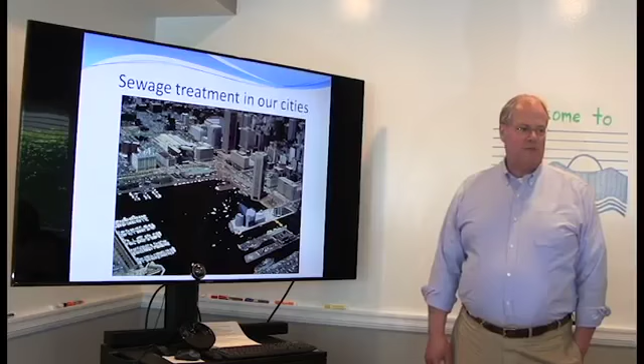Okay, so Maryland, where we are today, is home to over 5 million people now. Most of them, about 80%, live in the cities, but many live in the suburbs and rural areas of the state, which you have visited. And I'm going to talk a little bit first about sewage treatment in the cities because I think this is most applicable to the situation that we're seeing in Rio today.

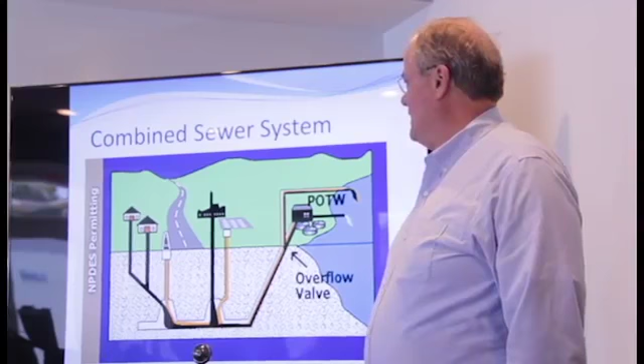So in the United States, there are basically two types of sewage collection systems. Of course, the first step is to get the sewage from the home to the sewage treatment plant. This stands for publicly owned treatment works, but it could be privately owned as well. We have both public and private. And the older type of sewage system is called a combined system. And this is where the sewage and the stormwater from the street runoff go into the same set of pipes and go to the sewage treatment plant.

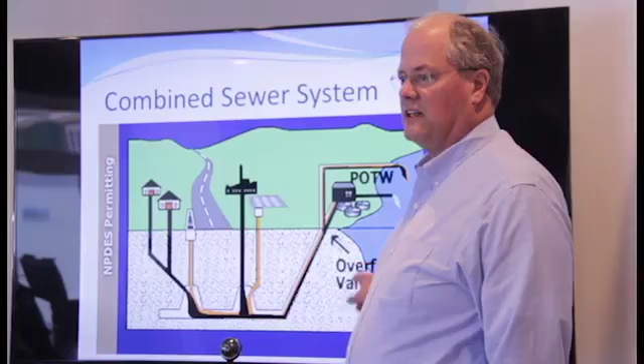And what happens is when there is a big flood, a lot of rainfall, there's an overflow designed into the system which spills the mixture of sewage and stormwater directly into the Chesapeake Bay or whatever the body of water is. So the system in Rio right now, because the collection system needs so much work, much of your sewage winds up in stormwater. So this is probably more similar to the situation in Rio than the other typical kind of system in the U.S.

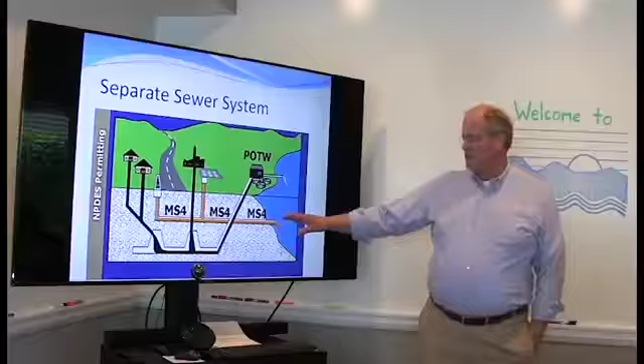The other is called a separate sewer system. And this is where the sewage and the black pipes from the industries and the homes go directly to the treatment plant. There is not a designed overflow because the stormwater is collected in a separate system of pipes which go into the water body. And so this is largely what Baltimore City is like. And on the other hand, Washington, D.C. is one of our largest cities with a combined sewer system. And Washington right now is in the middle of a $4 billion restoration effort to try to correct the spilling of sewage from the combined system.

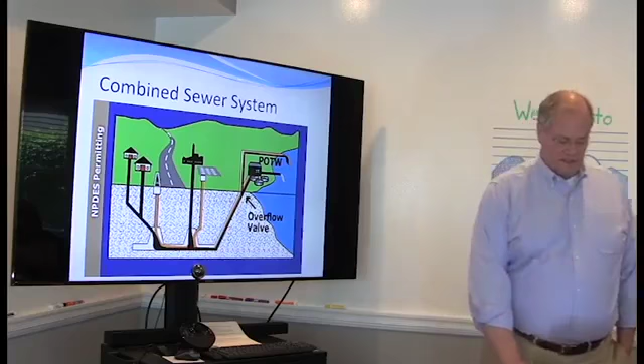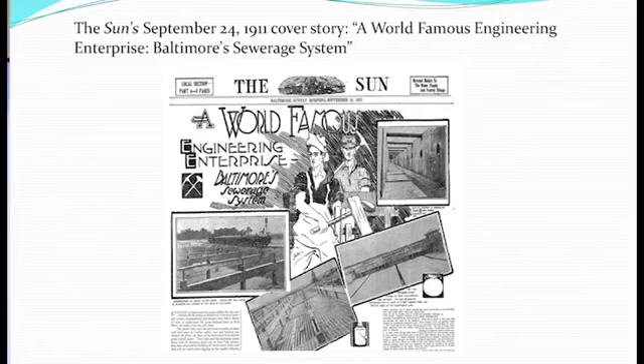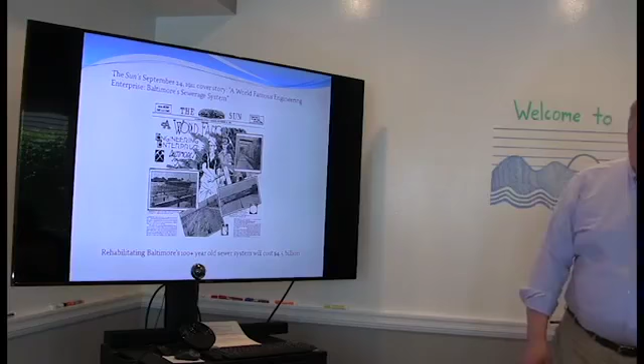So I'm going to focus on Baltimore for a minute. This is the Baltimore newspaper from September 1911. And it's announcing this engineering marvel, the new sewer system for Baltimore. So it's been over 100 years since our system was built, and right now we're in the midst of a rehabilitation program to fix the collection system that's going to cost an estimated $4.5 billion. So even though Baltimore has a much more developed sewage system than Rio, we are also at the same time in a major rehabilitation effort. So hopefully there are things from our experience that can be of help there.

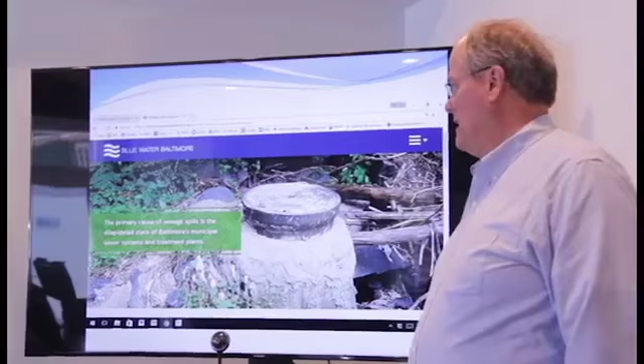This is the web page from one of our non-governmental groups, I guess a social action group in Baltimore. This is Blue Water Baltimore, and they have a whole web page devoted to educating citizens about the problems with Baltimore's system, and it's basically, as it says, the dilapidated state, the disrepair of our sewage collection system is the reason for the spills and problems.

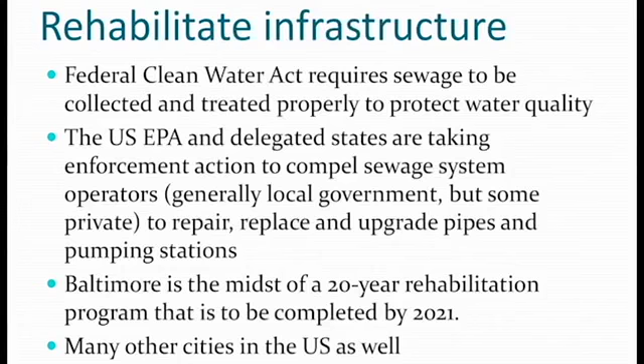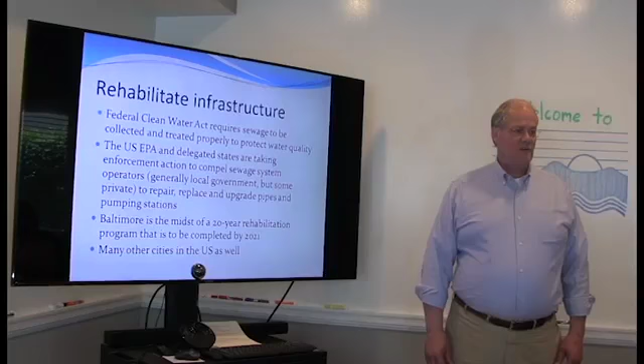So, major effort in the United States underway. All the old cities in the country, Baltimore, Washington, Philadelphia, New York, they're all undergoing right now rehabilitation of infrastructure required by the Federal Clean Water Act. The way the Federal Clean Water Act works, the U.S. EPA is in charge, but they can delegate responsibility to the states, and so the states and EPA working together are taking the enforcement action. And this rehabilitation is a 20-year project, which right now is scheduled to be completed by 2021. So we're literally in the middle.

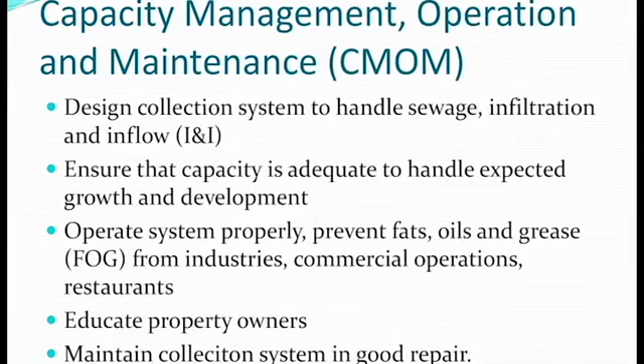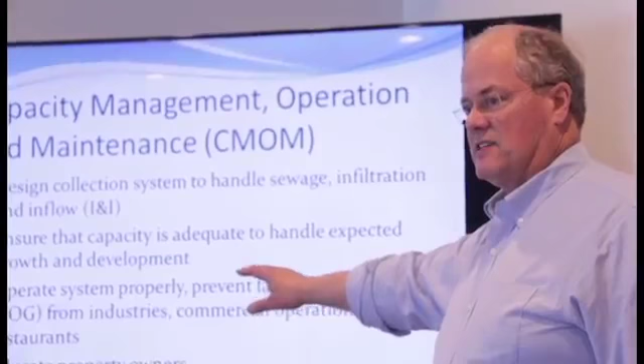In addition to rehabilitating the system, a large part of the sewage spill problems that we have occur because of improper maintenance of the system. And in the Clean Water Act, this is referred to as Capacity Management, Operation, and Maintenance, or CMOM. And it has to do with making sure that the collection system, the size of the pipes and the pumps, are large enough to handle the sewage that is expected to come into the system. That's capacity management. And then operation and maintenance has to do with ensuring that the system's kept clean, that there are preventative measures in place. For example, there's something called prevention of fats, oils, and grease, or FOG.

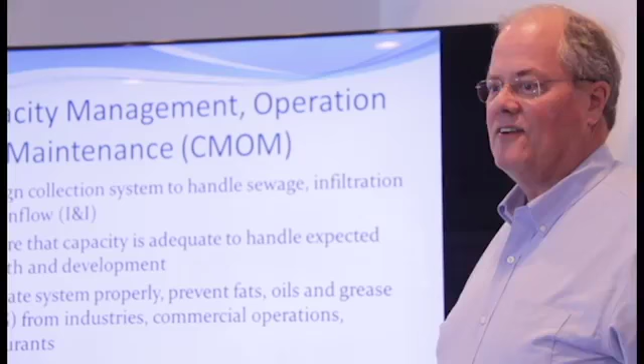Restaurants and homes and some industries, if they discharge things into the sewer system, it can literally gum up the works. The fats, oils, and grease form clots, just like in your circulatory system if you have high cholesterol. And then education of property owners and maintaining the system in good repair.

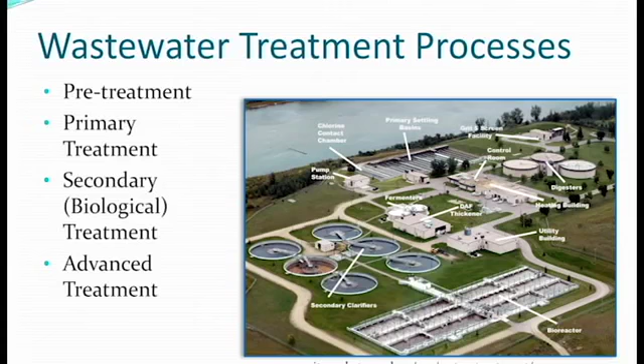So moving on to the actual sewage treatment plants themselves, we have many different technologies and different size plants in the state of Maryland, and I'm going to talk a little bit about the technologies. The basic treatment processes we use, pretreatment to get grit and logs or whatever else may come into the system out before it goes into the primary treatment area where chemicals are added and you get coagulation, the sediment and particles coagulate and settle out.

Then it moves into secondary treatment where we use biological organisms to treat the sewage, and then advanced areas, the bioreactor and thickeners in the system will allow all the sludge to settle out and discharge fairly clear, clean water. And the final step before discharge is chlorination to kill the bacteria, and that then is discharged.

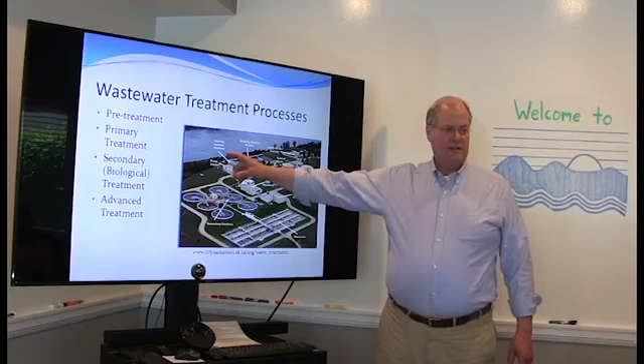This is very similar to the Alegria plant. The design of the Alegria plant in Rio is very similar to this. The difference is Alegria, and my understanding is most of the other plants in Rio, do not have disinfection as an end step. And this is something that we looked at early on in my travel to Rio, and something we believe needs to be seriously considered as an addition to your sewage treatment processes.

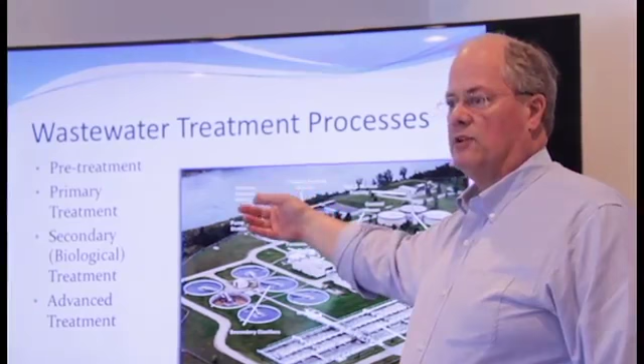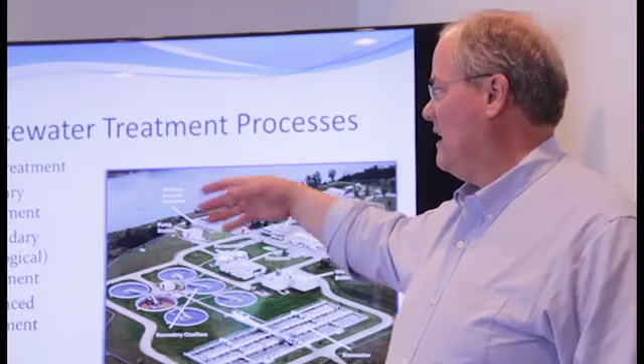And I know there's some controversy. We heard it expressed that chlorine can be toxic to wildlife. However, as high as loading is in Guanabara Bay right now, we don't believe that chlorine is going to cause a problem for the fish. It will in fact be dissipated almost as soon as it gets discharged into the bay, because the bay is so heavily loaded with organic material and bacteria. But what it will do is reduce the human pathogenic viruses and bacteria that are a big problem in Guanabara Bay.

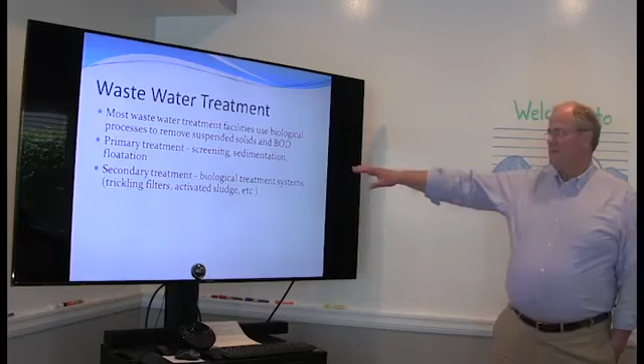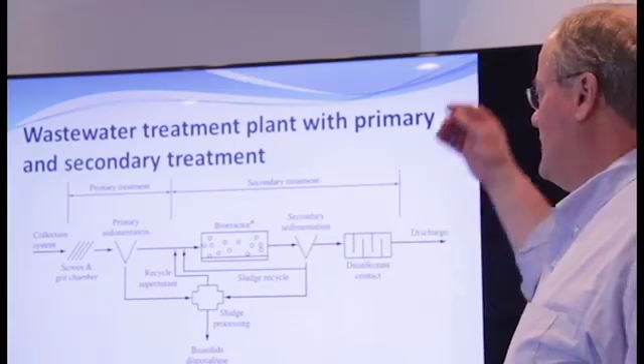So most of the treatment facilities are like what I just described there, pulling out suspended solids and biochemical oxygen demand, again, very similar to Alegria. And the treatment steps we refer to: primary, pulling out basically the big pieces, screening and floatable material, trash or whatever. Secondary treatment, the biological treatment process, and then a typical plant with primary and secondary treatment is shown in this graphic here. I mentioned the screening grit, primary sedimentation, the sediment from here, also from the bioreactor, moves into sludge processing, and I'll talk a little bit more about that in a minute.

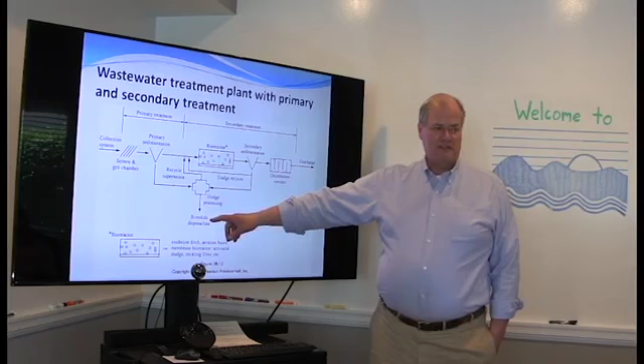My understanding is most of the biosolids or sludge in Rio wind up going to landfills. In this country, other disposal methods in addition to landfills are used. Then in Chesapeake Bay, in order to remove the nutrients, which are the big pollution problem in the bay, we've added what we call biological nutrient removal, starting back in '84, upgrading all of our state's major treatment plants with biological nutrient removal first, and then more recently, beginning in 2004, we started what we call enhanced nutrient removal, bringing nutrient levels down even further.

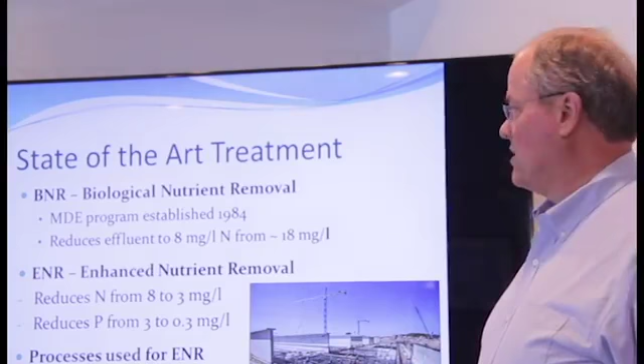And the company that I've been working with, KCI Technologies, is doing a lot of the design and engineering work for these advanced treatment plants. And this is one of the ones we're working on. This is the largest plant in Maryland. This is the Back River Wastewater Treatment Plant, and the largest plant on Chesapeake Bay is Blue Plains in Washington, D.C., that collects sewage from the whole Baltimore, Washington metropolitan area, but it's a very large facility.

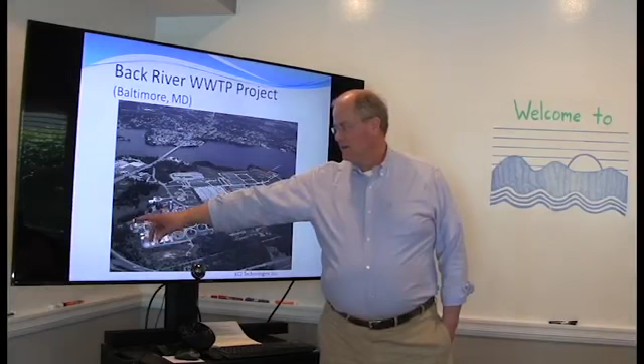And Back River is known in the neighborhood. You can see these kind of gold domes there. When you drive by on the road, these are towering structures. They look like two golden eggs. And they're actually digesters where the sludge goes in and is digested. They produce methane gas, which is burned for energy, which powers all the pumps in the plant.

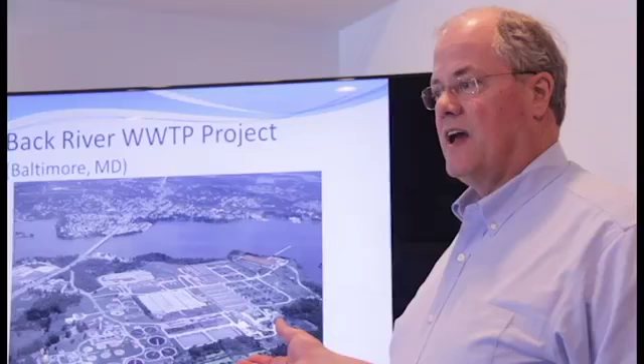And then the digested sludge is highly treated to produce what we call Class A sludge, which has been composted to destroy pathogenic organisms, and then it can be used as a soil amendment for cropland and gardening. There's actually a product that's sold in many of our gardening stores called Synagro, which is a sludge product, which home gardeners, unless they read the label carefully, don't really realize, but it's used pretty widely.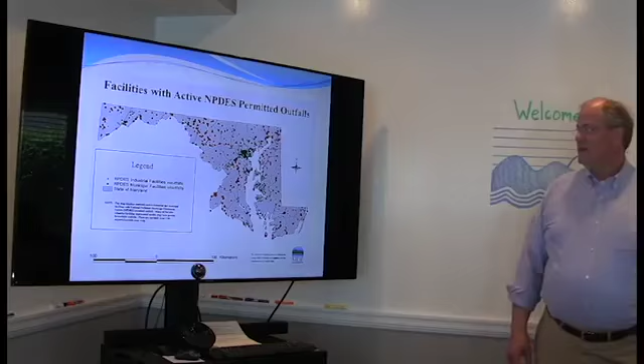And this gives you an idea of the number of discharges we have across the state of Maryland. The red are all of the towns, municipal and county discharges, and the green are industrial, and they're all held to very high discharge standards. And these are the major plants. These are the ones that are larger than 500,000 gallons per day, which is roughly equivalent to, I think, probably 20,000 people.

So all the bigger towns have the advanced treatment that I mentioned, biological nutrient removal and enhanced nutrient removal. And we're right here in Annapolis, and the sewage is going out right through that dot right there.

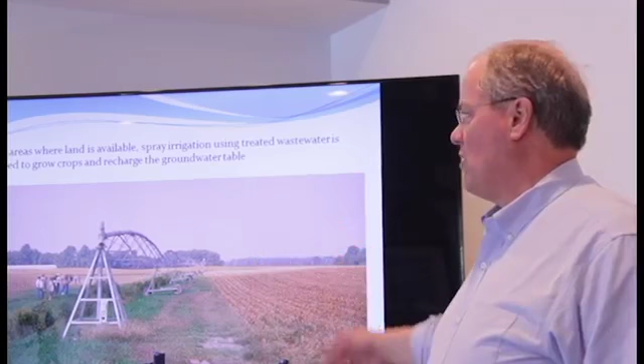And then in more rural areas of the state, the treated sewage is not discharged into the water or the river. It's actually used to irrigate crops. And it's typically not used for food crops, but it can be used for corn that's grown for animal feed. I should say not human food. But a lot of places have gone to growing hay and straw because that's very important. We'll talk in a minute about sediment erosion control. There's a big market for those kind of crops.

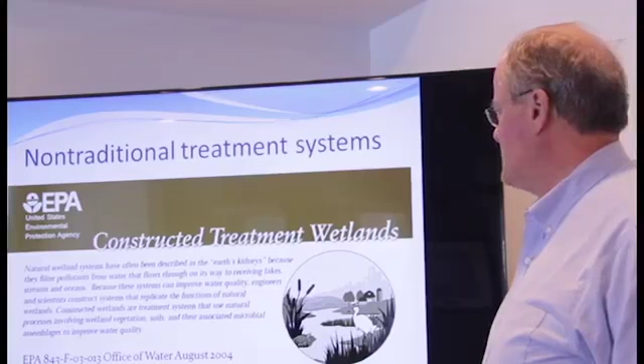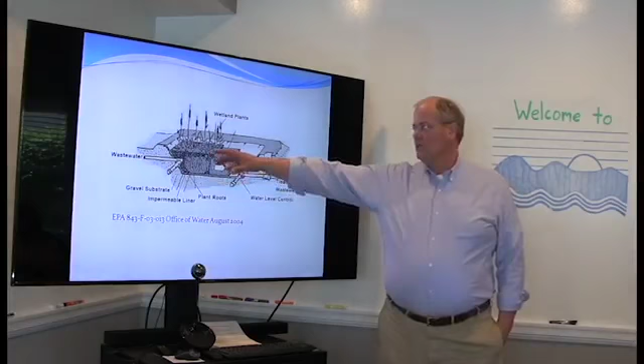And in the U.S., we also have what we refer to as non-traditional treatment systems, constructed treatment wetlands. This is a fact sheet from the U.S. Environmental Protection Agency, and wetlands are very effective at removing contamination from sewage and runoff and other things. And it's fairly simple construction. The wastewater comes in, it's set up so it filters through the wetlands before it passes out, and it can then be discharged.

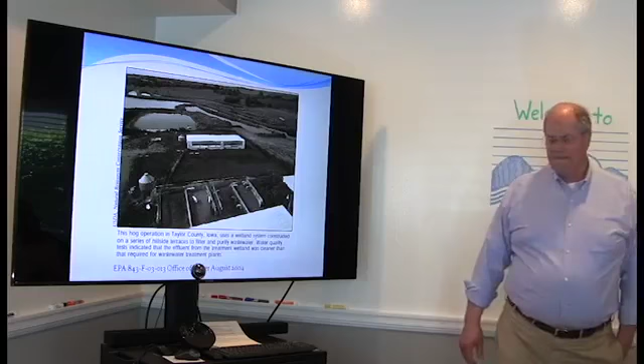And this is just a photo from the fact sheet of a large wetland treatment system for a hog operation. These things can be used for animals as well as humans. And of course in Rio, there are a lot of mangroves growing, and mangroves are also used, like wetlands, to treat sewage. This is from an article about a constructed wetland treatment system in China.

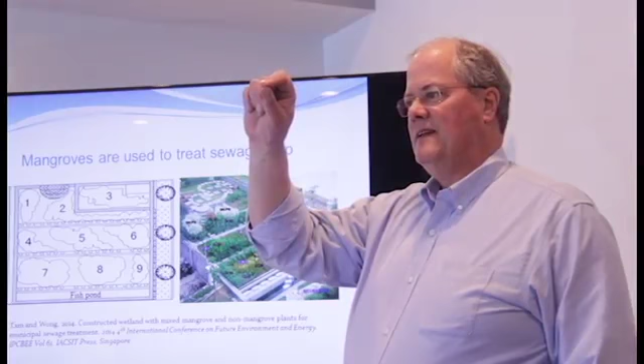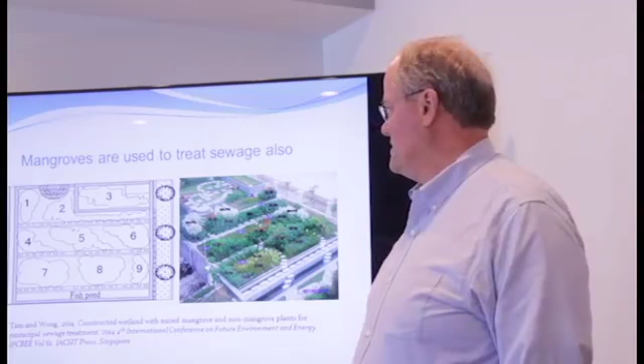And in fact, when I was in Rio and we went out to what's the town at the north part of the bay, Magé, thank you. They were in the midst of designing and building a treatment system like this that would allow the mangroves in the coastal area to treat the sewage from a school there. And so there are what we would call non-traditional opportunities that could be very beneficial in the Rio vicinity.

And then in rural areas, we basically dispose of sewage in the ground. And a house, rather than having a connection to a sewage treatment plant, will have a septic tank and a drain field. And basically the sewage comes out of the house, the solids settle in the tank, the liquids go off the top into what's called an infiltration trench, where it can then percolate through the soil. And if it's designed properly, the soil removes all the bacteria before it gets into the groundwater.

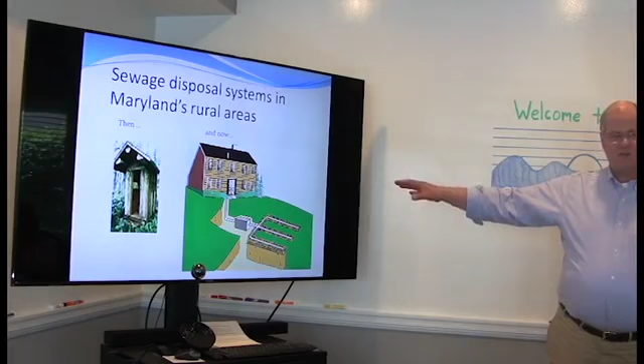One of the big problems we're having is a situation where the water table, the groundwater is too high, the bacteria doesn't get removed, and these can create quite a serious public health problem if they're not properly maintained. We have regulation requirements. These are done by the state and local health departments to protect public health, prevent exposure to sewage, and the homeowners and businesses pay for their systems themselves.

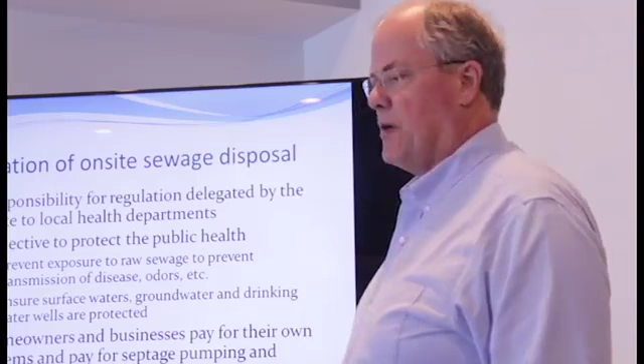These are called private sewage treatment systems, and you can see roughly $5,000 to $7,000 per home is part of the capital cost of the home to put the system in, and about $100 a year for pumping and disposal of septage, the solid waste. So it's a pretty inexpensive way to treat sewage. And the septic tanks, they need to be pumped out, and the solids are pumped out and taken to sewage treatment plants for disposal.

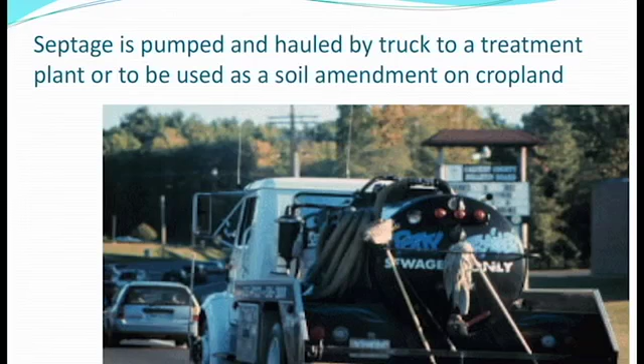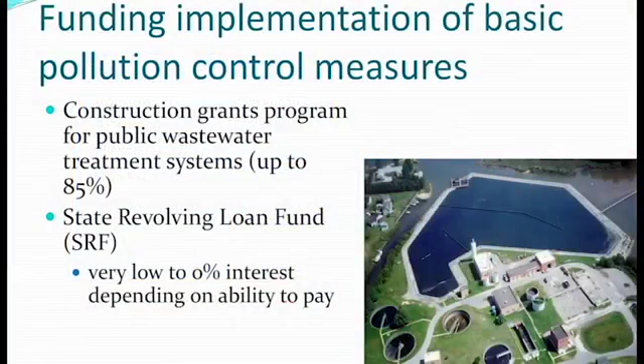So the funding for all of this initially came from the federal government through what was called the Construction Grants Program that was passed with the Clean Water Act in 1972. And they paid up to 85%. In the 90s, the Construction Grants Program was changed to what's called the State Revolving Loan Fund, and the federal money then was given to the state to put in a state-operated bank, and the state then could lend the money to sewage treatment plant owners at very low interest. The owners would pay back in, and so it's called revolving, to keep the fund available for upgrading additional plants. And this has been a very popular and successful program.

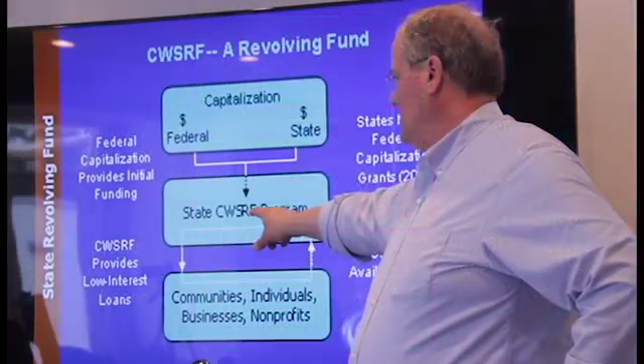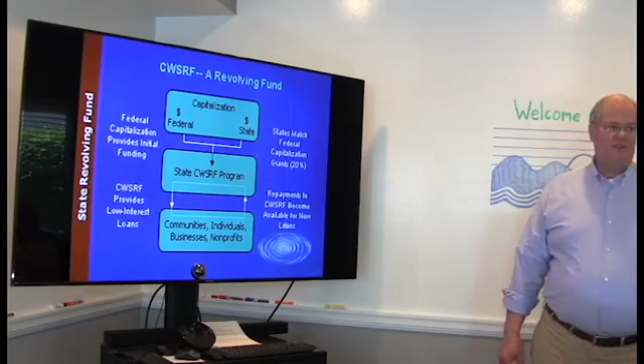So the capital funds come federal and state, more fed, less state, into this bank that I mentioned, where they loan the money out to communities and businesses and individuals, and it pays back. And so this is called revolving. And right now, Maryland's revolving loan fund has a capacity to hand out about $700 million a year in low interest loans. So it's a very effective way to finance sewage treatment. It's also similarly used for water.

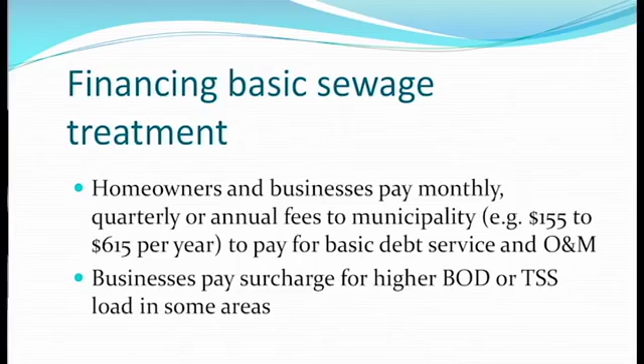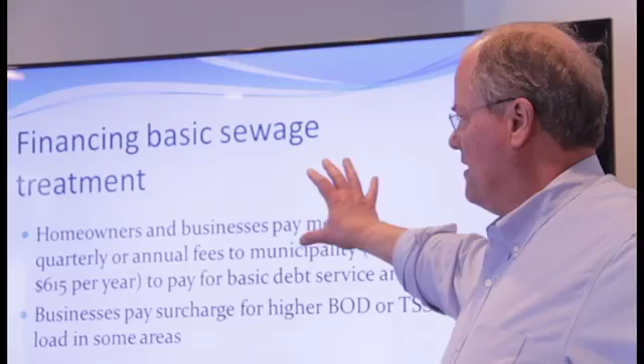And the individual homeowners and businesses pay monthly, quarterly, or annual fees to whoever it is that owns their sewage plant, somewhere in the range of $155 to $615 per year. It's actually going up because of all these rehabilitation programs that I've talked about. But that pays for basic debt service and O&M, operation and maintenance of the system. And then businesses that are discharging a higher strength waste may pay a surcharge. So that the people who use the system finance the basic operation of the system.

The advanced wastewater treatment, the state shares the cost on that with a special grant program, and it's general obligation bonds, meaning the state government borrows the money to upgrade and then pays it back over a 30-year period.

For the enhanced nutrient removal, we actually created a special fund called the Bay Restoration Fund, and everybody in the state who has a wastewater treatment system pays $5 a month toward this fund. So as an individual homeowner, I pay $5 a month. If I live in an apartment complex that has 500 homes in it, I pay 1/500th of their fee, which is roughly $5 a month.

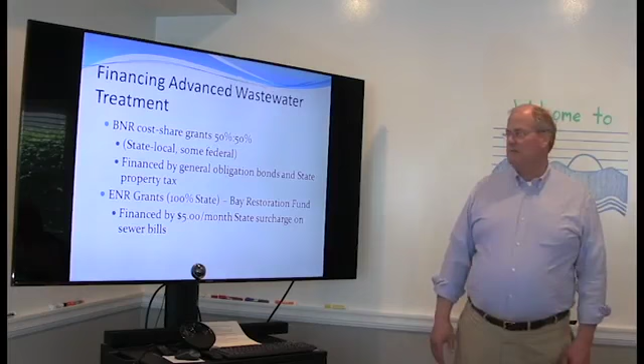And a business that has a lot of sewage that's equivalent to, say, 10 homes, instead of paying $5 a month, would pay $50 a month. So it's rated or adjusted based on what your use of the system is.

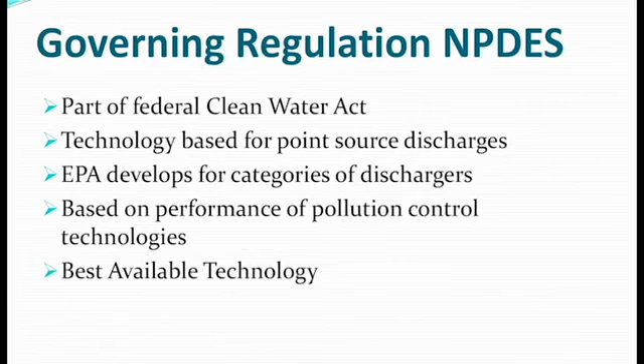All of this is regulated under the Federal Clean Water Act and the program called NPDES, which is National Pollutant Discharge Elimination System. And EPA develops criteria for different dischargers and requires certain pollution control technologies be in place to make sure that sewage is treated properly.

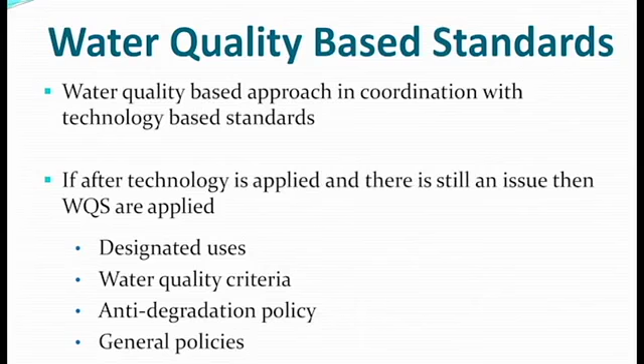If the basic technology is not good enough, as it is here in Chesapeake Bay, we need more protection. A water quality-based approach actually is put in place. It requires even more advanced treatment. So the biological nutrient removal and enhanced nutrient removal I talked about before aren't done everywhere, but they're done in places like Chesapeake Bay where we need extra nutrient reduction, and that is in order to achieve water quality standards for the bay. And there are many other water bodies, San Francisco Bay, the Great Lakes, that have these additional special requirements.

And based on my study of Guanabara Bay, there is very high nutrient loading to the bay, and actually the JICA studies came to the conclusion that even with secondary treatment, which removed the BOD load, there's enough nutrient in the discharge to grow the BOD back again in algae in the bay, so that eventually I think Guanabara Bay, to really meet standards, is going to need even more advanced treatment. But one step at a time. Let's get the basic collection and primary and secondary treatment in place.

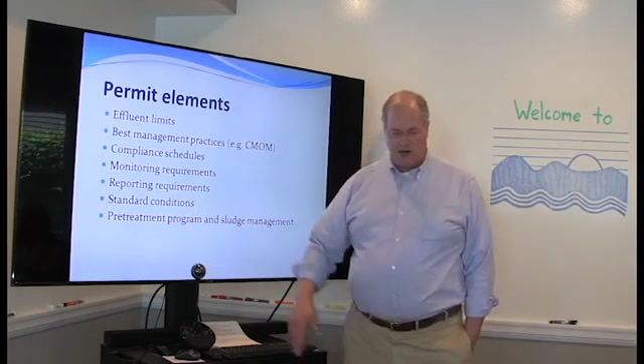Every plant has a permit with specific limits. Management practices required, like I mentioned, CMOM, monitoring, reporting, and this is important. And I don't know whether anything like that is in place for Rio, but many industries discharge into the sewer system. And in order to avoid poisoning the biological treatment system in the sewage plant, there need to be pre-treatment requirements in place to ensure that if industries are discharging something that would harm the biological system, that can be removed prior to discharge into the sewage treatment plant.

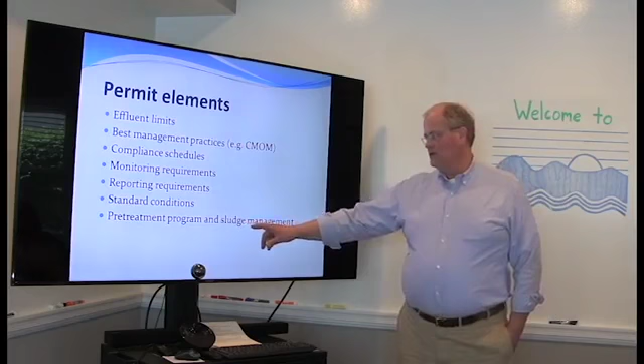And this is something that Baltimore City struggled with for a long time, where industries were poisoning one of the sewage plants pretty regularly, and they made a major effort to go in and establish pre-treatment requirements, and they've actually fixed that problem. And that's also important because if you want to use the sludge for cropland, or I've mentioned the Class A sludge at Back River that is even used on home gardens, you need to have metals and other things removed from the sludge. So those things all go together.

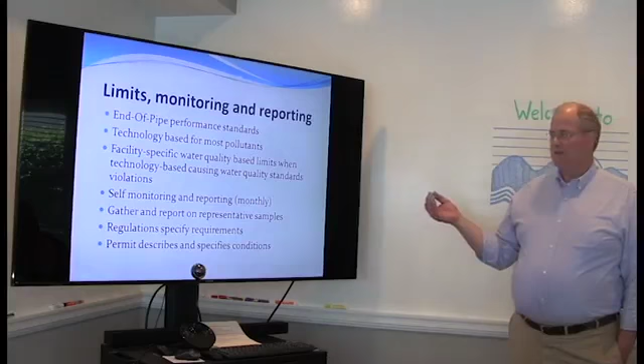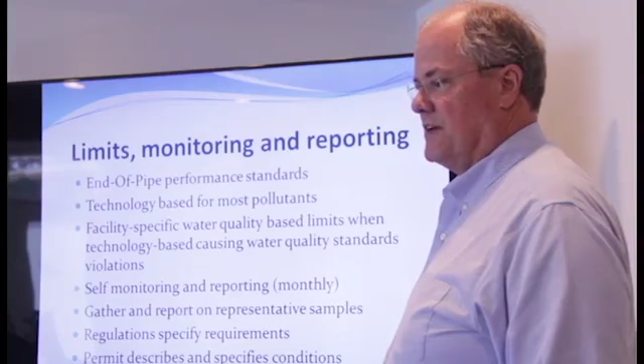And then, of course, there are limits on what can be discharged, and you have to monitor that and report it to the state government. And this is something that we didn't study in Rio, but it was being studied by another company under contract, PSAM, and I understand that there are a number of issues that need to be addressed in terms of improving the monitoring and reporting of industries and sewage plants in Guanabara Bay. And this is essential to making sure things operate properly.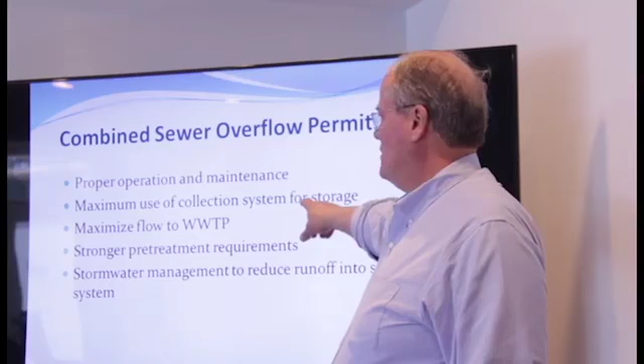And systems that have a combined sewer, like Washington, D.C., have additional requirements on them. And the way that they try to deal with the contaminated runoff is to use the collection system for storage. In Washington, D.C., they're actually building large underground tunnels which will hold the sewage and stormwater mix and discharge it at a rate that the sewage plant can treat. And this is coupled with stormwater management, which I'll talk about in a minute, to try to reduce the volume of stormwater going into the system.

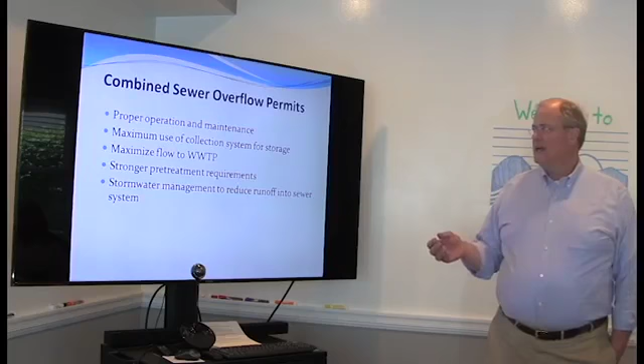But I think that there is a potential, and one of the groups working on the sewage problem in Rio de Janeiro was looking at the fact that much of the sewage goes into these ditches and waterways that lead to the bay. And collecting and treating the mixture of stormwater and sewage from those waterways, to use the extra capacity that you have on plants like Alegria, may be a quick way to begin to bring the sewage load to the bay down. And it's kind of analogous to the way that we're dealing with combined sewer overflows. The sewage is going into the waterways, and particularly during dry weather, it's just moving very slowly. If you could capture it there and pump it to a sewage plant, I think it would make a big difference.

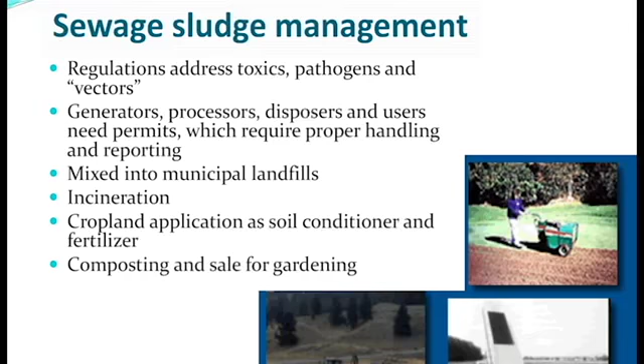Sewage sludge, of course, can go to a landfill. We, under the Clean Water Act, manage this carefully to make sure that any toxics or pathogens are addressed in the sludge through pretreatment. Generators, processors, disposers and users have permits that require special handling.

It goes to the municipal landfill. Some of it is incinerated. Cropland application as soil conditioner: about 40% of our sludge goes out on cropland, and I mentioned composting and sale for gardening.

I should probably also mention an additional measure; I probably should have added it to this. The Back River plant is actually using the sludge in a digester to produce methane gas to generate energy. So I think that's kind of the wave of the future for sludge and biosolids, to use it to generate energy as much as possible as well.

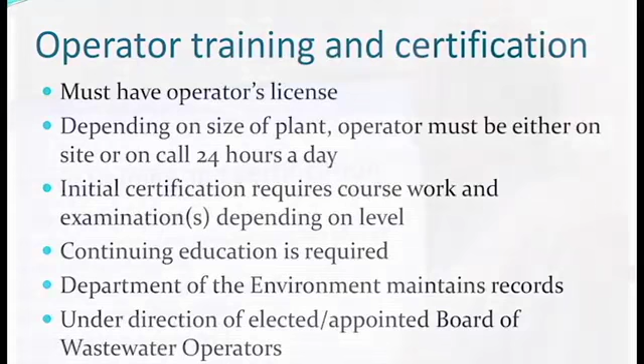And of course, none of this equipment works properly without a well-trained workforce. So we also have operator training and certification requirements. Everybody has to have an operator's license, depending on the size of the plant. The level of license requires coursework and examinations to maintain your license, just like an engineer or a doctor or a nurse has to maintain their license. The operators have to do that.

The Department of the Environment maintains this, and there's an elected board of wastewater operators from their association that oversees this to make sure that it's all fair. And then enforcement is primarily a state responsibility, but EPA watches over that.

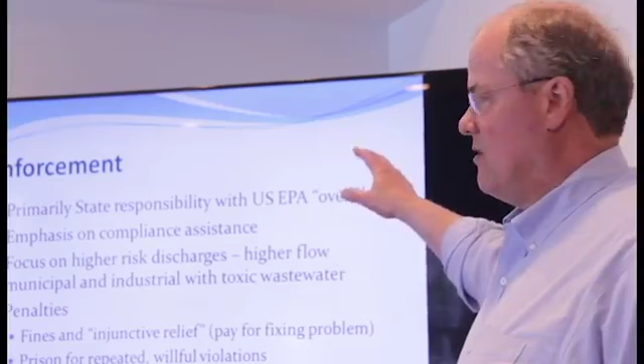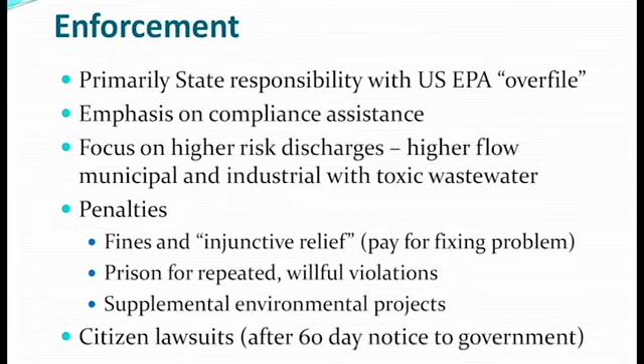We need to make sure that all of these requirements that I've been talking about are maintained and adhered to, and penalties can be imposed, financial penalties, but also what we call injunctive relief. If you've got a broken pipe or whatever, you've got to pay to get it fixed right away, in addition to paying a penalty. And we have had some criminal violations where people have actually gone to jail for falsifying reports.

And backing it all up, if the state government or the federal government is not taking sufficient enforcement action, the Clean Water Act has citizen lawsuit provisions where any citizen who sees a violation can file a notice of intent to sue. The government has 60 days to fix the problem. If they don't, then they can go into the courts themselves. And we've had many citizen suits that have been very successful at forcing businesses and municipalities to clean up pollution.

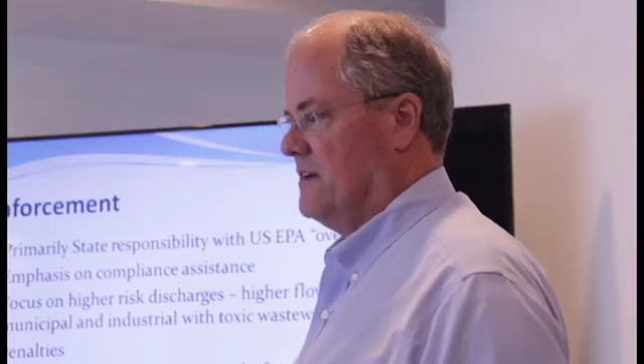And I think in Brazil, the counterpart to the citizen lawsuit is your public prosecutor, and I know that there has been some action by the public prosecutor recently. And then once you have this whole system in place, you've got to make sure that you don't allow growth and development to overwhelm it, as can happen in many places. And as you know, in Rio, a lot of the illegal developments are causing problems.

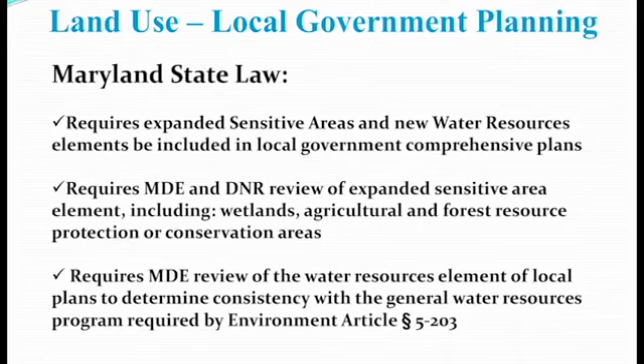In Maryland and most other states in the U.S., there are land use requirements, and we have rules in place to require comprehensive land use management to make sure that they have adequate water supply and are dealing with the pollution properly. The law actually requires sensitive areas and water resources elements to make sure that the plans take these factors into consideration, and it requires that our Department of the Environment and Department of Natural Resources review those and approve them prior to local governments adopting these plans.

And this diagram just kind of shows how it works. Local government comes up with a comprehensive plan with oversight from the state to make sure they've considered all of the elements that are needed to protect water resources and everything else. That then goes to the water and sewer plan, specifying where sewer is going to be provided and how many homes or businesses can go onto that sewer system.

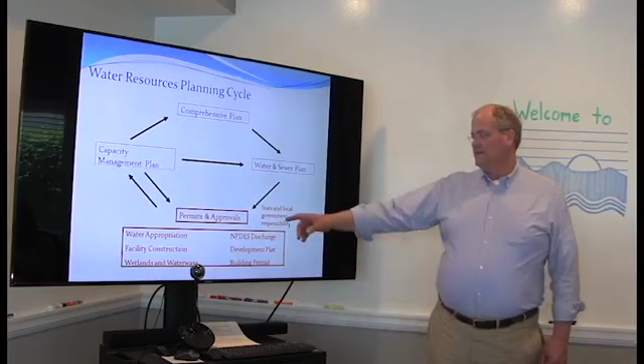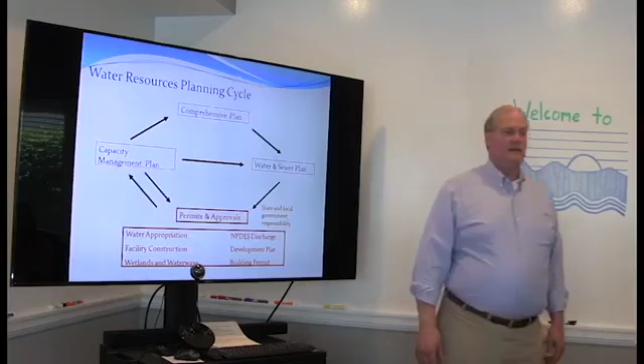Once the plan is done, there are a number of permits and approvals that have to be obtained: water appropriation, which has to do with how much water they take in for public use, facility construction, protection of wetlands. I mentioned the discharge permit, and every building needs a development plat and a building permit. So the development would be the community, 500 homes or whatever it is, and each individual home would need a building permit in order to be built.

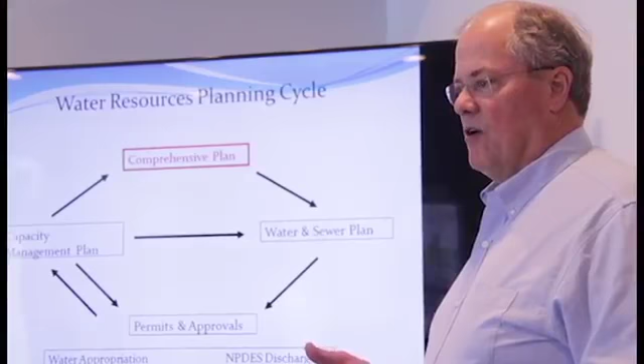And then the local government has to monitor the capacity of the wastewater and the water system, make sure that capacity is not exceeded, and if it looks like they're getting to capacity, it goes back and they have to redo the comprehensive plan. We call that the water resources planning cycle. Without that planning, all of the other things I've just talked about could be overwhelmed. So you really need all of these components in place to have clean and healthy water.

So I know it's a lot, but there are a lot of parts that we need to protect. So that's, believe it or not, a quick overview of sewage treatment in the U.S. And all these things are in place and operating as we speak. Not flawlessly. We have sewer spills and other problems, but it's working pretty well.